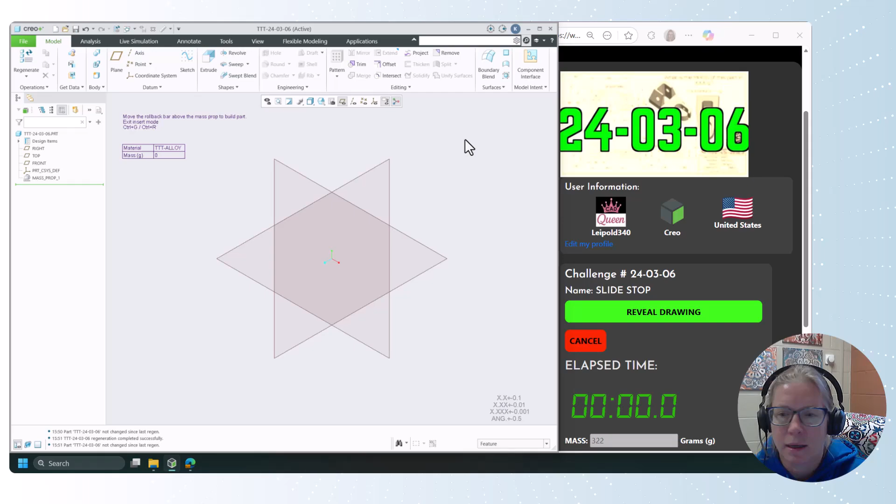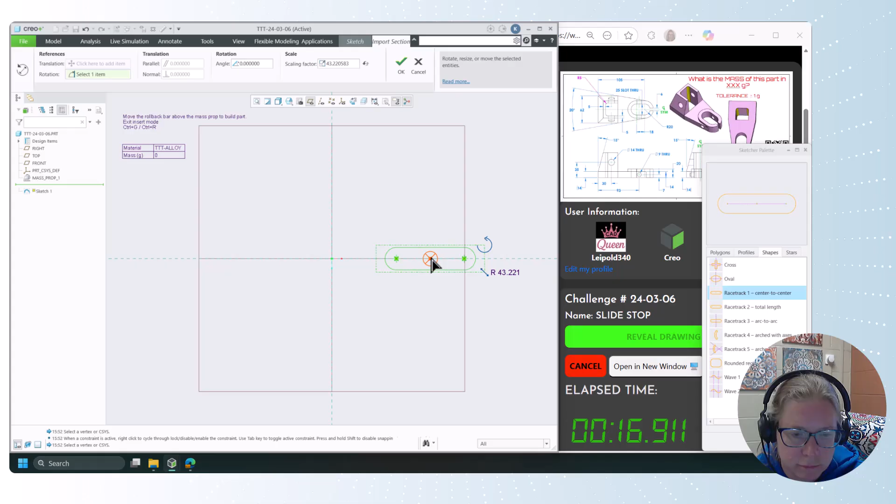All right, let's jump in at 240306. We are in grams, and here we go. I was kind of hoping to use this for a blend tutorial, but the dimensions don't quite work for that, so we're gonna make the sketch. We're gonna do a sketch region. And we'll go from there.

So this is going to be the inside of that cutout. So we'll make that 25. The center to center distance is 18, which we have here. I am going to use the modify tool just to push that off a little bit. Oh, it really doesn't want to move. Interesting. All right, so we're gonna make that coincident.

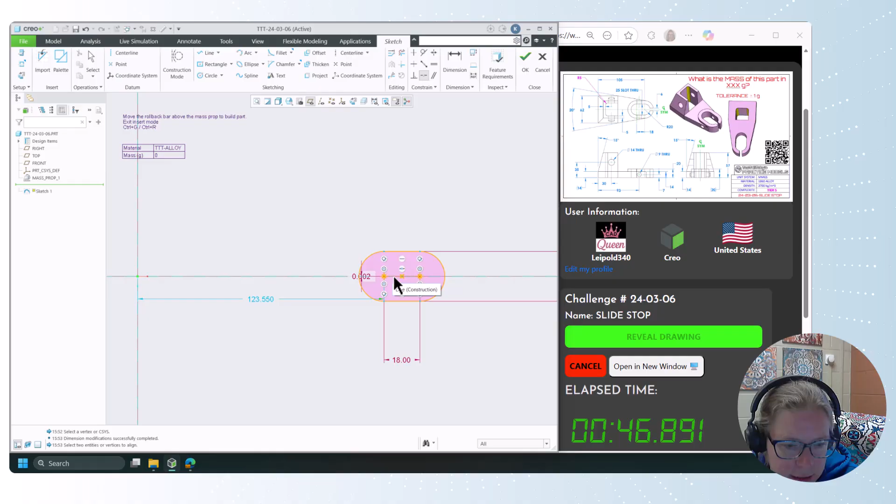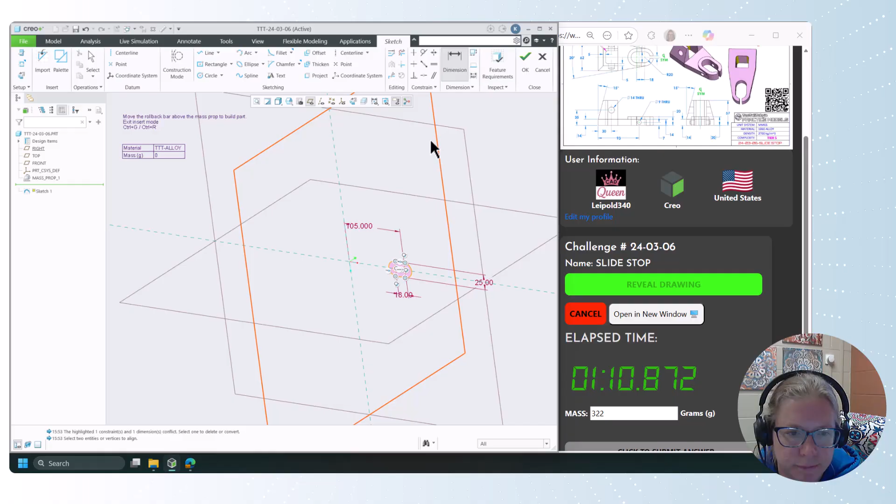All right, my resolve sketch popped up way away, so we're gonna delete that dimension and add the dimension from the far right point to the datum of 105. Okay. All right, so let's bring that back.

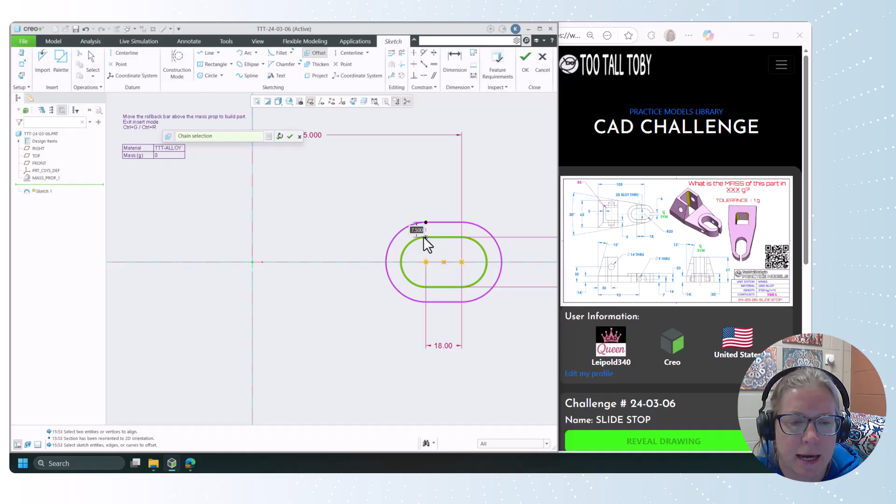This racetrack I want to offset. So I can select one of those, but then hold down Shift and grab the loop and drag this out here. And that value, let's try that again. That value is going to be 7.5. Middle click to finish that up. So there's that R20 that shows up over here.

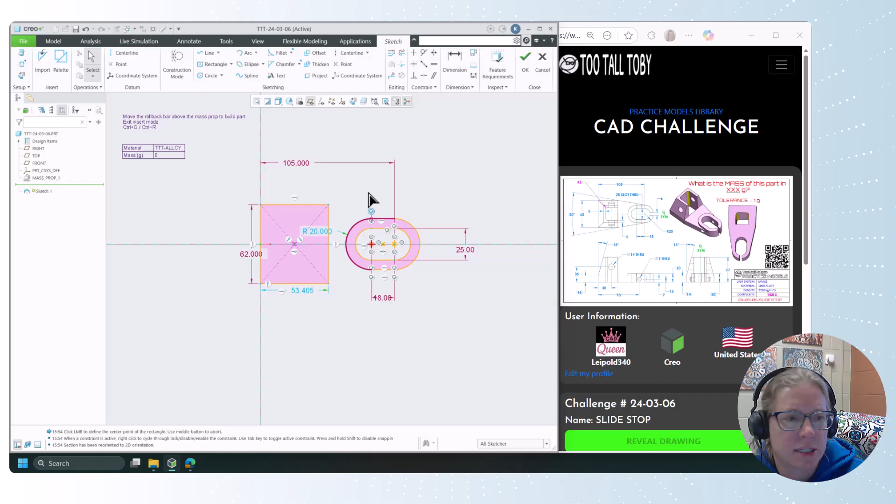We're also going to add a center rectangle with a width of 62. Okay, and not this dimension, but a line going from the rectangle to the arc, and it needs to be tangent. There we go. And line, tangent. We're good. This is not the dimension I want. Oh, look at those. I have both of them highlighted. Beautiful. I can jump right in, right click, angular dimension, 20 degrees.

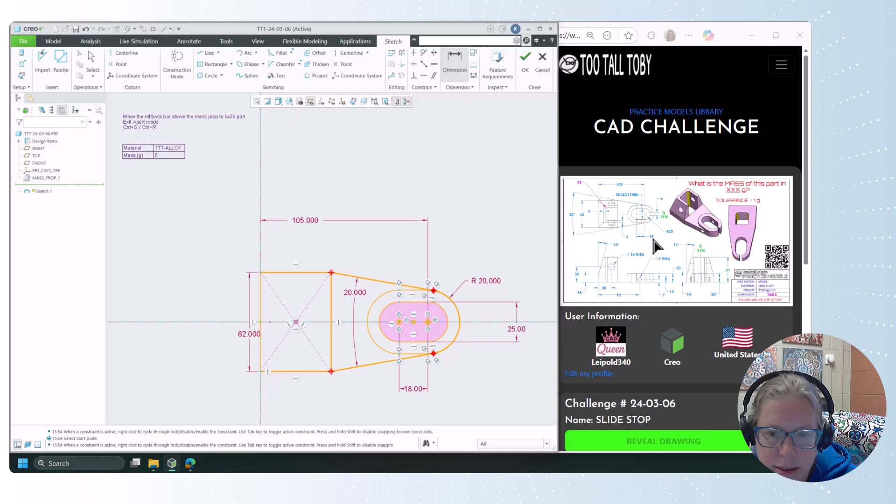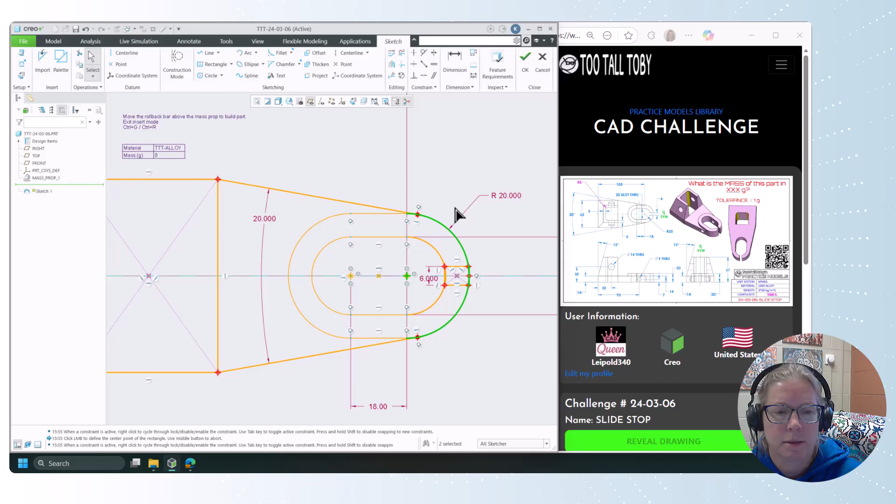Okay. So even though, you know what, let's just dimension this arc over here. 20. Okay. R20, 20 degrees, 62, 18, 25, 6, 105. So I still need to add this little rectangle over here. Grab here, give this a width of 6. And then I'm going to grab these two lines and make them, oh, it doesn't like it with that selected. But if I grab those two lines, I can make them tangent. Beautiful.

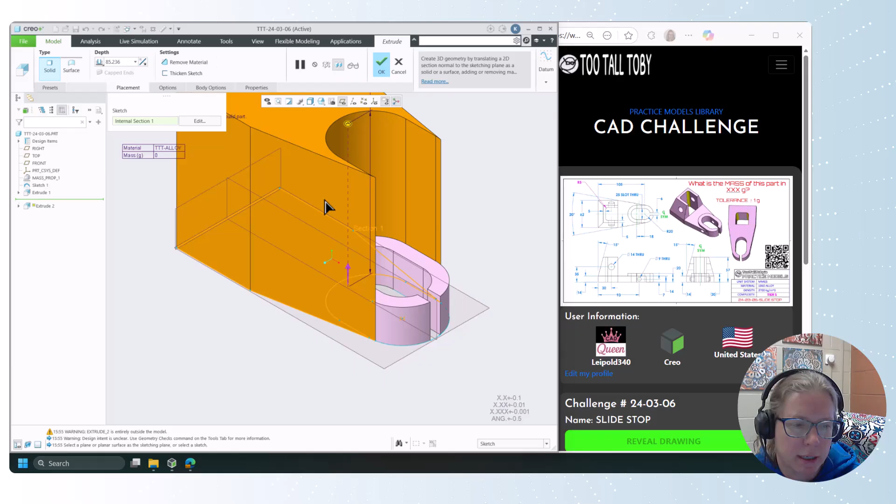So I will use my sketch region option. Select this geometry, extrude that for this height of 20. Middle click to finish that. Grab these two sections, extrude them for a height of 14. I'm going to grab this bottom section, extrude that. We're going to direct that the other way. We're going to add material, overall height of 57. Okay.

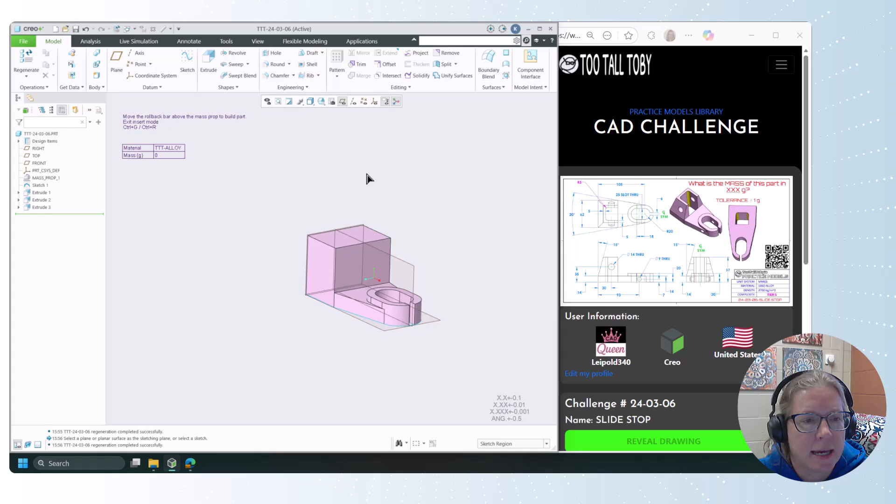All right, so now we're going to add that draft. So we'll set the draft. The draft surfaces are these 3 edges or surfaces of the block. The draft hinge is the top face. And we're going to split that at the hinge. So the top one will have an angle of 15. The bottom one has an angle of 0. Okay.

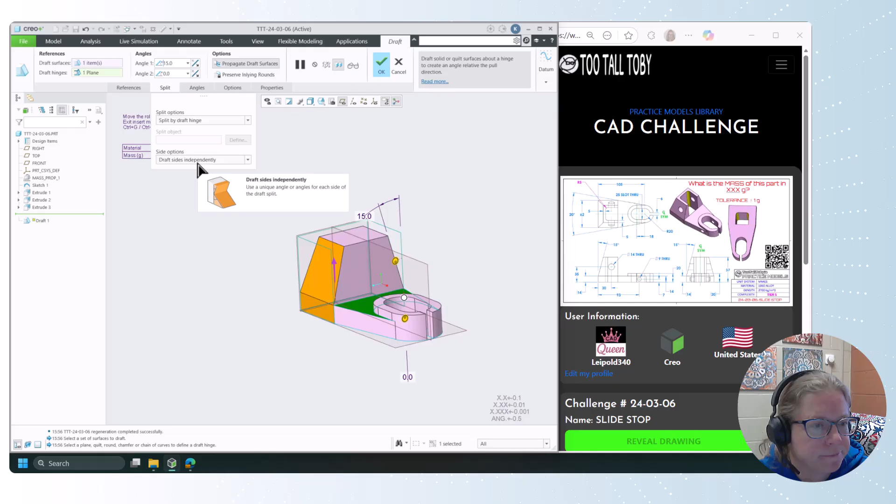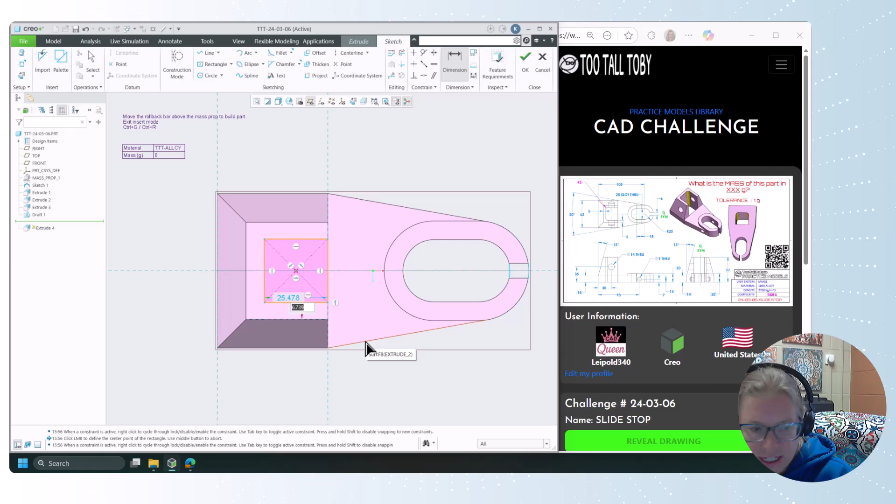All right. Let's add the hole. Let's go extrude. And I'm going to add a rectangle. Oh, I got an equal sign in there, which I didn't want. So let's grab that equal sign, delete that. And we'll add some dimensions. Let's just do it this way. Dimension line to line, middle click. That's a 25. Dimension line to line, middle click, that's a 25.

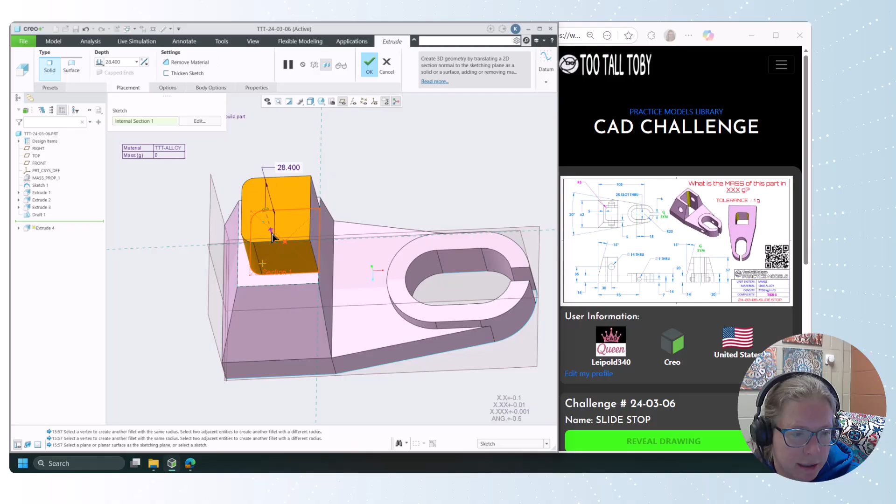And then we're going to add the fillet tool to both of those corners and middle click to make this radius a 5. Okay. All right. So if I flip that the other way, right click on there and go through all. Things are looking really good. We just have to add a couple of holes.

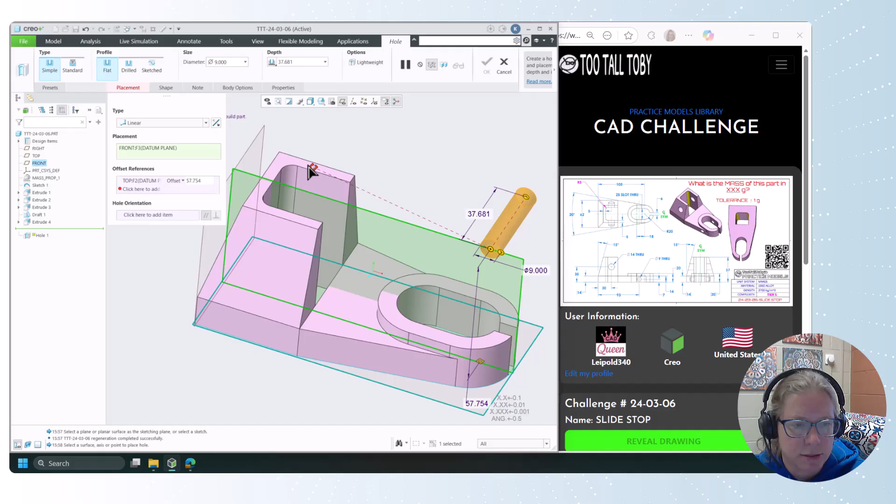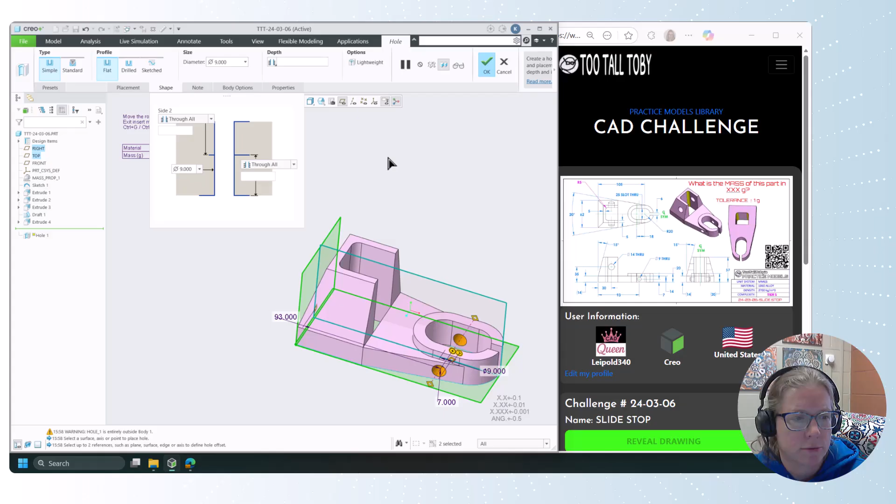I'm going to use the linear hole tool and place it right on this plane. I'm going to drag this down and use those drag handles to reference it off of the, I was afraid of that. There we go. Off of the top and front planes. Come on, drag handle. There we go. All right, so we are going to go up 7 from the top plane and over 93 from the right plane. And we'll use the diameter 9. And we are going to do through all in both directions. So through all side 1 and side 2.

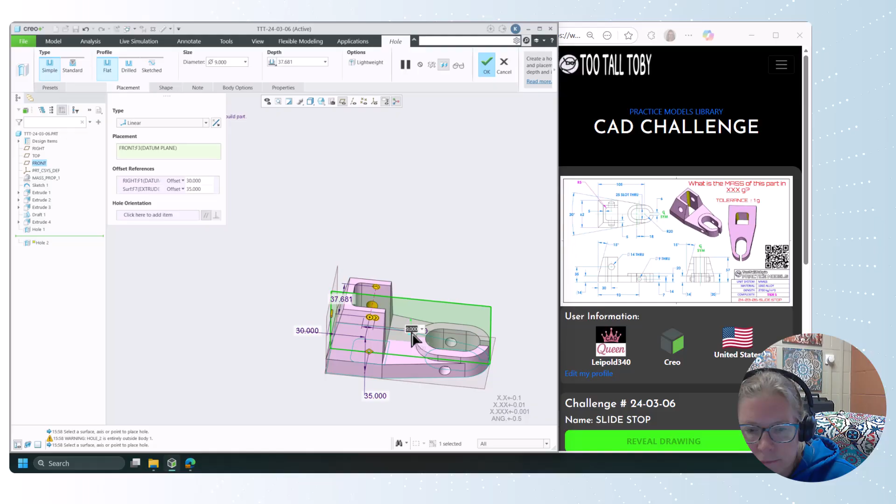We're going to do the same thing. We're going to do hole. We're going to place it on the right front plane. Use my drag handles to the right plane and I would say the top plane, but you can also use a surface. We can use that surface down there instead. This has a height of 35. The distance over is 30. The diameter is 14. And in the shape tab, we're going to go through all and through all.

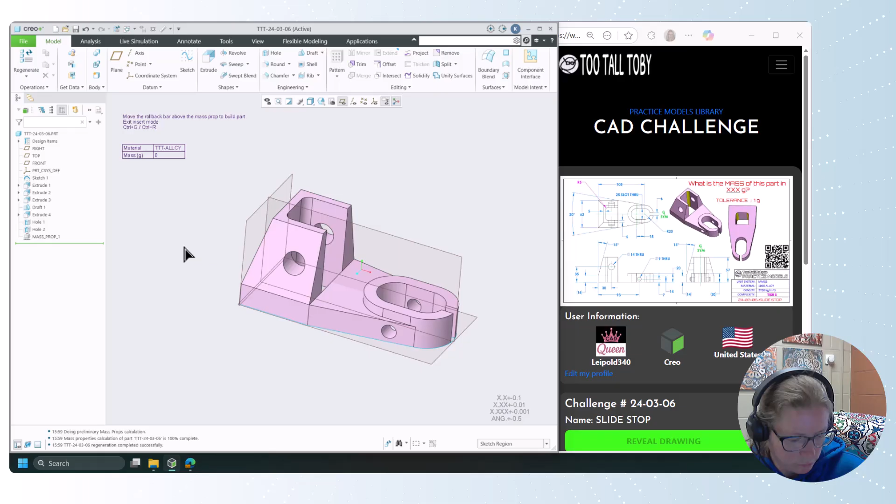So give it a peek. That looks okay. Let's see how we did. 318. And that is great. So we'll get that submitted and nicely done.

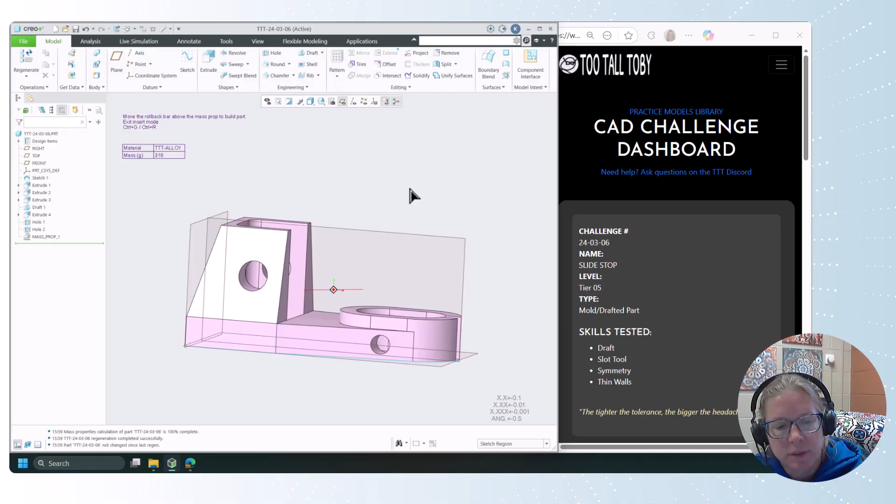So here we talked about using the draft, and we did a split surface or a hinge on the top and then split it at the hinge. We also used the linear hole tool with the drag handles to offset it from the top and right planes. Yeah, took advantage of that slot tool and the offset of an entire chain, not just one edge.